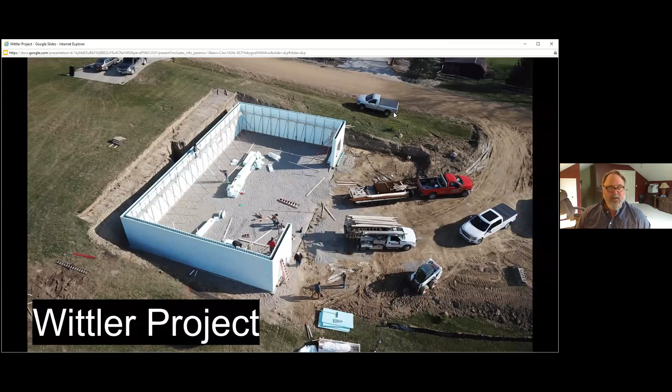I started this building back in November, and I've been planning it for about 10 years. We have a home on the lake and needed a place for boat storage and lawnmowers and all that good stuff, and had them scattered all over. So in thinking about the building, the longer time went by, if you're in the concrete industry, which all of us are, you start thinking about how can I do some interesting concrete stuff. So what I tried to do was make a building with as much concrete and cement as I possibly could. That was the purpose of it.

There were a few considerations we needed to do in regards to the building. One thing I want you to notice is that with the footprint of this building, we had a fairly large hill right here and it wasn't much use for the property. So we kind of wondered, could we dig the building into the hill and have it there?

So that's kind of what we decided to do. I had a neighbor up in this area that really didn't want to stare at a major building. They didn't want their view of the lake to be obstructed. So we talked with each other and figured we'd put this in the ground, and now from their view, all they can see is a little bit of the roof, which worked out pretty well.

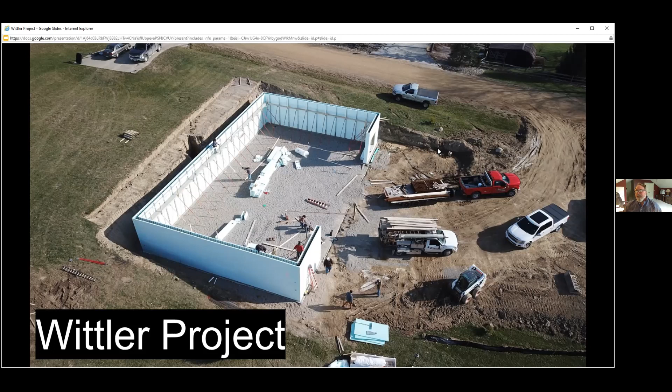But we moved an enormous amount of earth out of here. You can see that from the first slide I have. It took quite a while. We broke ground, I think, in the third week of November, so this was going to be a wintertime project right from the get-go.

There's our lake house right now across the road. We're planning on doing an expansion there. Based on the results of the ICF and other things we did on this side of the road, I'm very seriously thinking about incorporating all that over there. Now it is a log home, so one of the things I'll talk about at the end of the presentation is how I can tie that all in.

But when we started the project, there were a few things we wanted to accomplish throughout it. This is just an overview, starting with the research and development of an extended pot life polycarboxylate. Now that's directly related to our business — as Steve said, I'm the president and CEO of Premier Concrete Admixtures.

When you're doing R&D work for admixtures, you can do all you want in the lab with mortars, and then once you develop your products for mortars, you move on into concrete and do your testing in the concrete lab, and things can go wonderfully. But until you get those products into actual field concrete — mixing them up in a truck, going through the batch plant and everything else — sometimes it doesn't work out the same. So a good research and development system has to go all the way from mortar into the concrete lab and out into the field. Well, there's pros and cons to that.

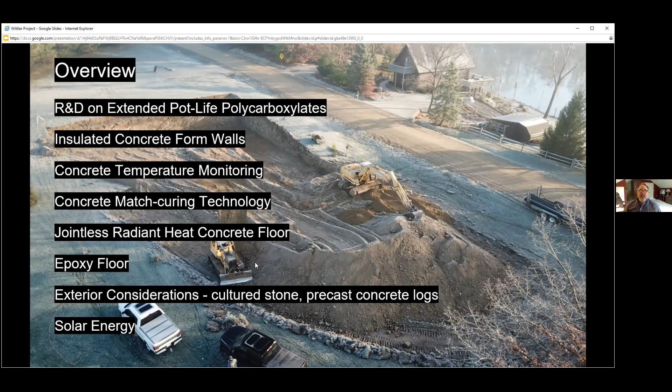So with the overview done, let's just dive right into it. When you're looking at footers, footers are a great place to test concrete. You don't need a lot of strength, they're very forgiving. If you have to add water to get the stuff in, no problem. It's just a great place to take advantage of doing a preliminary run on what you want to achieve down the line. So when we decided to do that, we picked the same mix that we were going to run with throughout the entire project.

The only difference between the mix in the footer, the wall, and the floor is that the footer and the wall contain natural stone. The interior floor consists of crushed limestone instead. I did that because I wanted to try to get the most durable floor I could on the inside, because of the epoxy coating and because we weren't going to be sawing it in any way.

So when we started the pour, we went with a standard mix, which I'll outline here in a couple more slides—564 pounds of cement, et cetera, but I'll get to that soon. We wanted to look and see how the concrete performed versus its pot life, as I said earlier. We wanted to check out the air consistency. If we had to retemper, we wanted to establish some retempering guidelines so that when we got to the wall, we weren't going to overshoot any slumps.

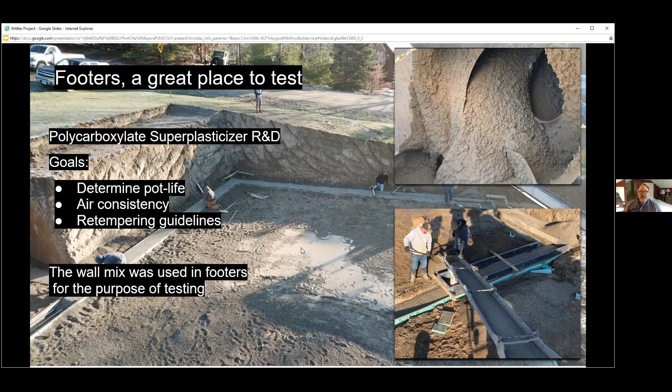When we did the curve, we dropped off enough concrete to make about 16 cylinders. The main thing you want to look for on breaks with the curve is usually early age accuracy. That's the biggest difference between concrete put in a cure box versus knowing the accuracy of your 1-day break, your 3-day break, etc. The reason you want to know that is because that's usually when decisions are made regarding stripping a wall, recycling forms, or whether someone can release a tendon in pre-stress situations. Those early strengths are critical, and relying on a cylinder all the time, depending on how it's cured, is usually fairly inaccurate.

So when we make the curve, the maturity consideration you always want is to be conservative. How are you conservative? When you make that concrete into your cylinders, you want to try to get the highest allowable air content and the highest allowable water-cement ratio. The reason is you want to make the concrete as weak as you can while still meeting specifications. That way your breaks and your maturity estimates will generally be lower than what's actually in the piece you're trying to gauge. In maturity, it's always best to be on the conservative side, and one way to do that is by making that curve concrete as weak as possible.

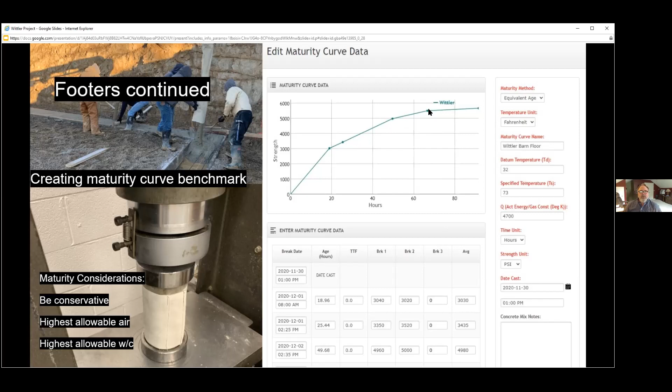To give you some dimensions and considerations on what we had with the wall, the width of the project was 48 feet wide. Why did I pick 48 feet? We did that because of the trusses. We were putting attic trusses on top of the building, and that was the longest span we could have without having to bring the trusses in pieces and reassemble them on site. It was also a trucking issue. 48 feet was the longest continuous span I could get on a truck.

The length of the building is 80 feet long. The reason we settled on 80 feet is once we had our setbacks on the property lines, etc., that's about as long as I could make it.

The ICF forms came from a company called Nudura. I know there are plenty of other options out there. Honestly, the reason I settled on Nudura is because my basement contractor was familiar with it and had done jobs with it in the past. This project came together fairly quickly, so I changed my mind a couple times, going back and forth, and in the end it was easier to just run with what he said.

That was a good choice anyway, because I'm very ecstatic with the performance of the product. I like how they go together, I like the rebar systems, everything was really cool. The other nice thing about Nudura is since I'm building this in Michigan, I elected to be my own general contractor, so I'm pulling my own permits. Nudura had engineering stamps, which I had to have for my plans to be approved by the local building inspectors. So the design, most of the spacing of the rebar and everything came from Nudura, so I didn't have any problem pulling permits.

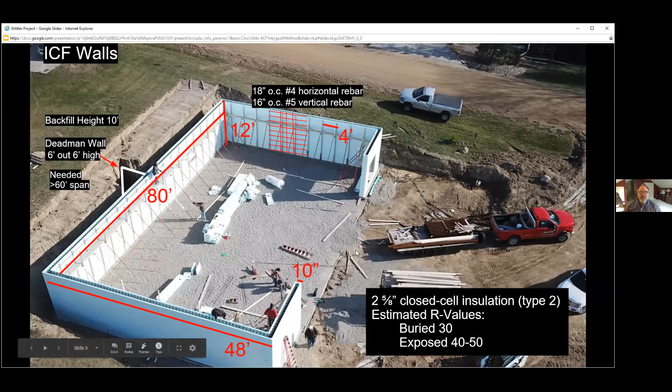Once the walls were up, we got on to our next phase of the project where we wanted to do some temperature monitoring, and also while doing the temperature monitoring, incorporate maturity estimations and match curing.

We were kind of curious because I really didn't know what the heat would be in these areas. I had originally expected this top level to not be as warm as the rest of the concrete, mainly because this was an open top. This top was left wide open after the concrete was filled.

We got some interesting results from it. Actually, I don't think I have a slide of it, so I'll just tell you now: the coolest part of this pour actually ended up down here on the bottom, and it was at times 10 degrees cooler than everything else. The only thing I can attribute it to is that it was sucking the heat out into the ground. Of course, the heat rises up throughout the wall.

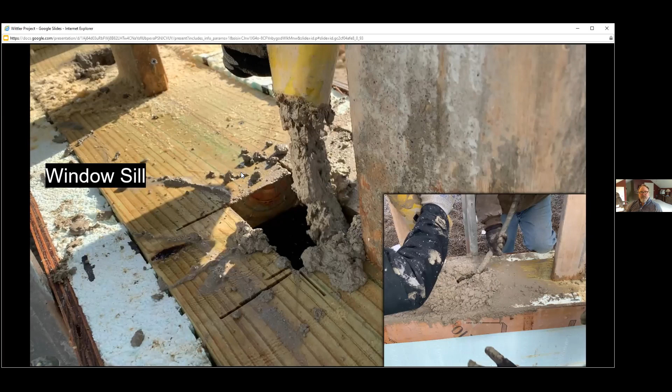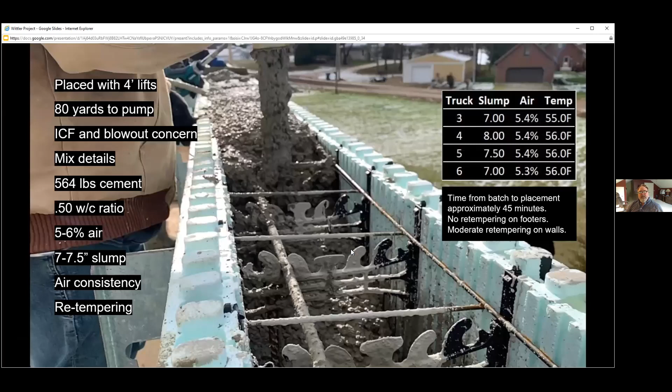This picture shows the cylinders from the actual pour itself. We did the same thing as we did on the footer mixes: we dropped off a sample at the plant—you can do this on site too—made the cylinders, put them in the box. Then the node on site took all the information from this pour and sent it up to the cloud, and the cloud sent it back to this unit.

This unit was recording and telling the heating and cooling system—telling the water where to go and how quick to heat up—so that the maturity curve you saw before graphing up would tell the water to increase in temperature, so that it makes the concrete get to where it is in the wall.

You'll see that this cylinder right here also has a temperature sensor in it. So when the water gets the cylinder up to the temperature, this tells the system that you're where you need to be, and then it just keeps continually adjusting.

So when you look at either verifying a maturity curve or actually wanting to see what the true strength of the concrete is in the form, this is by far the best way to do it.

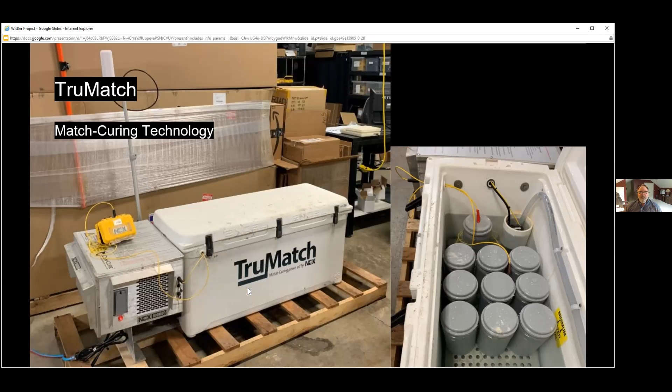In addition to doing the match curing and the maturity estimates, this is something I have wanted to do for a very long time. We will do more experimentation on it, but I wanted to see what different cure boxes did in relationship to the actual strength of the concrete.

I've got a lot of customers out there that have gone through hell with regards to cylinder breaks on the job site. They're not accurate, especially at early ages. They close the gap toward 28 days, but nobody had really ever told me, in the 35 years I've been doing this, or I haven't seen a real good comparison on what happens when a testing company comes out, or somebody makes cylinders and sticks them in a plywood box or some other kind of housing in the dead of winter. In the summer, I'm sure there are other effects to it, but I haven't gotten to that yet.

Here in the dead of winter in December, we decided to do companion cylinders on all of these methods of testing. Normally, if you're on a job site, you'll see a plywood box is where a lot of people put cylinders. Some will put it in coolers that are just plain coolers, with no heating devices in them. Some are field cured—we did field cured cylinders on this. What we predicted, they'd freeze—and they froze. So you're not going to see any information on field cured cylinders, because that's a total waste of time.

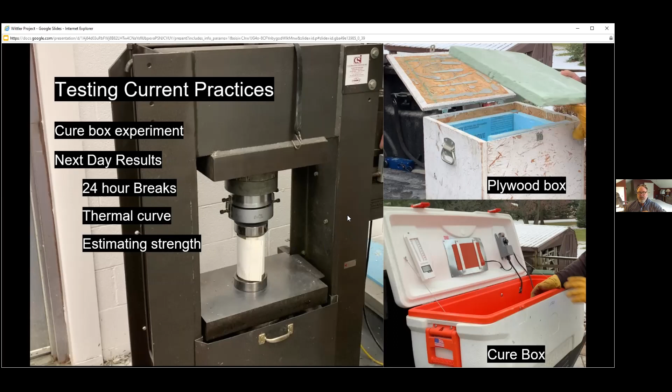The things we looked at: we wanted to compare the 24-hour breaks on all these units. We wanted to check the thermal curve to see where that was in relationship to the various stages in the wall. And then we wanted to see how estimating the strength went. So at 24 hours, based off taking a cylinder out of the TruMatch box and breaking it, the actual strength of the concrete in the wall was 3,240 PSI.

The projection we made when we estimated the strength based on our maturity curve was 3,172 PSI, just a 2% difference. So our maturity curve was extremely accurate in predicting the actual strength of the concrete. We were happy we were a little lower than the actual strength because it was conservative, but that does not always happen. Maturity says as long as you're within 10%, your curve is good. We like to get a lot tighter than that. For this project, we were at 2%.

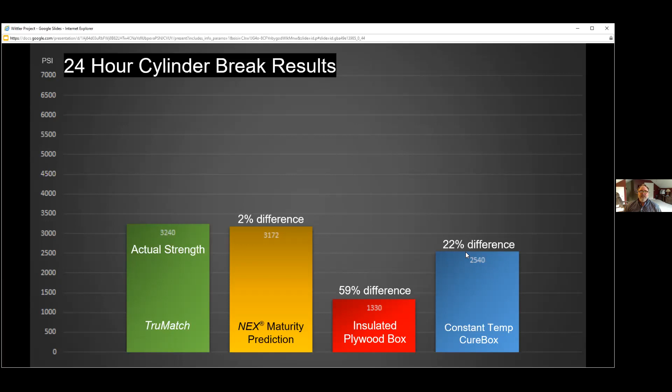Now we flip over to the insulated plywood box. 1-day break, 1,330 psi, a 59% difference. That box was not that cold, but that shows how drastic of a difference you can have in how representative those cylinders are to the actual strength of the concrete. We did a little better on the cure box that we had at a static temperature of 72 degrees, 2,540, but we're still 22% off. So we basically reinforced what we thought would happen.

Some engineers would probably justify this, and it's correct - if your specifications are only concerned about 28-day breaks, as long as your cylinders are in a constant temperature and not moving all over the place, you'll be fairly representative at 28 days. However, if you have any construction practices that need to estimate the strength of that concrete prior to 28 days, cure boxes just don't cut it.

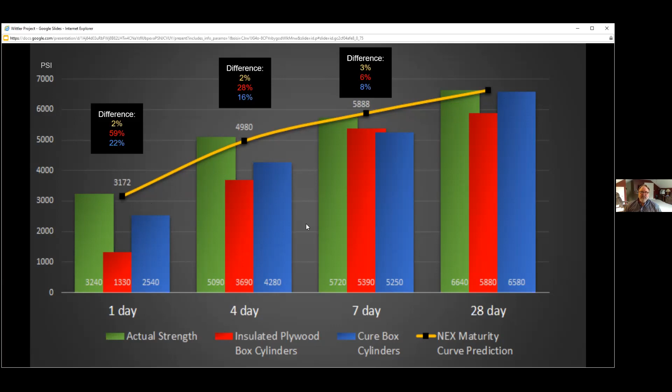Now we'll move on to the floor here. As I said, I wanted to do radiant heat - very, very happy with it, by the way. You know we had 48 by 80 feet for the flooring.

The concrete on the floor is 5 inches thick. I asked them when we designed that, is 5 inches okay? Most floors are like 4. They said not a problem at all - the only difference is it's just going to take that much longer for the floor to warm up. But once the floor warms up, there's no big difference between an inch of depth. I said earlier on, we did go with structural fiber at 5 pounds per cubic yard.

I was shocked. While they were power troweling, there was no grabbing of the fibers, no balling up at the surface, no real adverse effects whatsoever. I was pleasantly surprised with that.

But the real good thing was there wasn't any cracks. We don't have any cracks in the floor. So knowing that you can do a span of 48 by 80, 5 inches thick without worrying about any cracks, that was really cool.

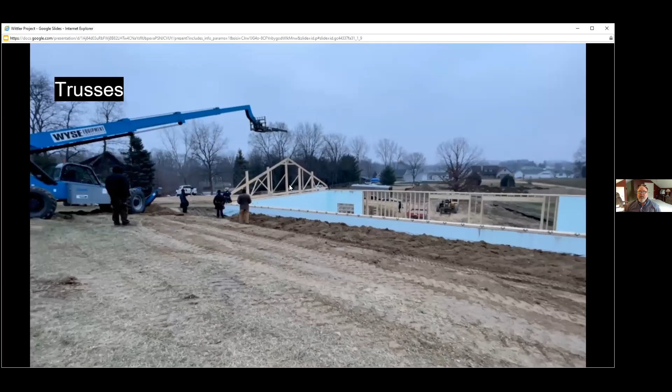I talked about the attic trusses just to get off concrete for a little bit and some other interesting facts. This is that 48-foot span attic truss. Here is the space that will be available to us. The cool thing is that to the peak of the ceiling, we're getting about 7 feet 10 inches, almost 8 foot. So it proved to be really spacious up top without actually having to add another level to the building.

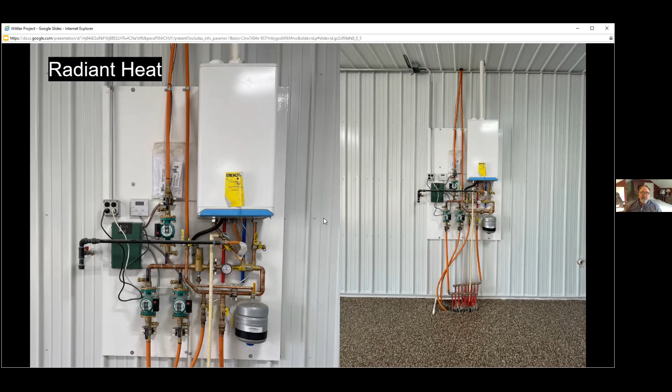Now, as things evolve with solar energy and backup batteries and things like that, if I want to, I'll pull this unit and go with an electric boiler at that time. But right now, the difference in cost between a propane boiler and an electric boiler is probably around 10 grand. So that was another reason that I decided at the last second to switch it out.

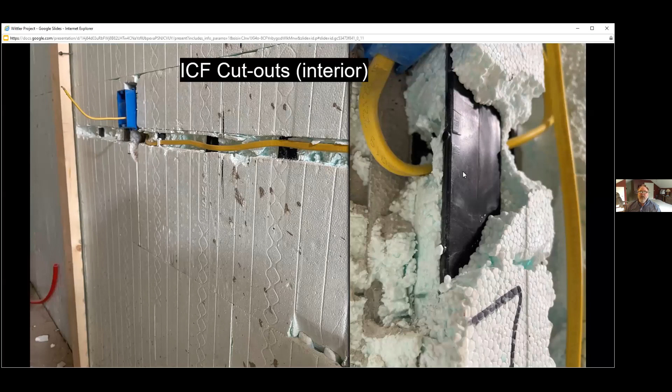That's what you use to adhere any siding to the foam, or anything you have to nail or screw down. I'll say that once you get into these suckers, they're hard to penetrate. If you have a self-tapping screw, once it grabs, it'll suck that screw right in.

When we did the steel siding inside of the garage area, I had a choice to make. Normally when you put up siding, you'll put your screws in every 9 inches on center, that way you never end up with a screw on the seam of the pieces.

But to put furring strips on there to make that happen, that's going to leave you the depth of the furring strip as a cavity. So if somebody ran up against the wall with any force, you'd dent the siding.

So I made the decision not to do that, and I stuck with the 8 inches on center of the plastic studs in the forms to fasten the steel to.

The only problem with that is every once in a while you'll end up with a mending screw that lands on the joints. So if you look at it, it's not going to look totally perfect, but it's a sacrifice I was willing to make, because up against this wall, you're not going anywhere. It's right up against the foam and the concrete, very sturdy.

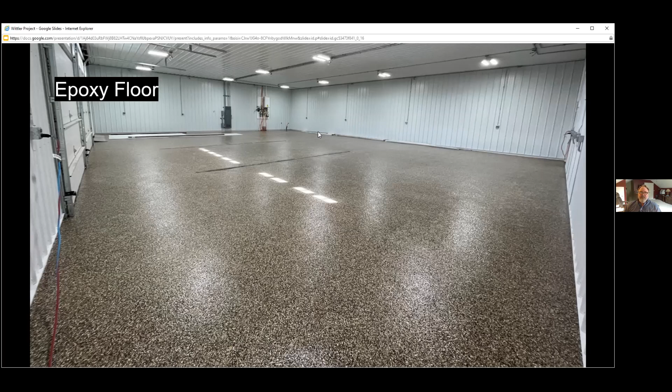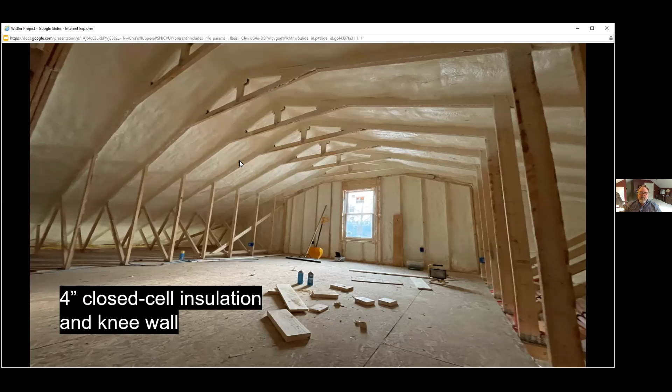This is 4-inch thick closed cell spray foam insulation. I'll see how it goes -- hopefully we don't get any condensation up there. I am putting in an air exchanger to try to help that out as well, but the building is extremely tight.

This is another view looking down the other way, just to give you an idea. Steve asked me yesterday why I didn't put a second story on. This is why -- we utilize the ability with the attic trusses to get a lot more room into it.

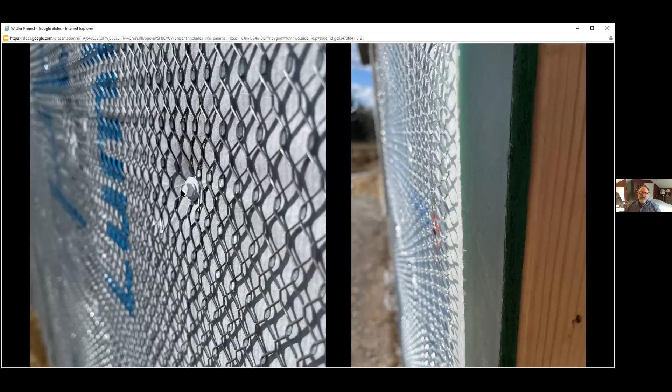So this is an example of how the screws get sucked into the plastic. Normally you wouldn't use this type of screw to adhere the mesh for the cultured stone scratch coat of the mortar, but we couldn't find any readily available, and these were leftover from the steel. They're 2.5 inches long.

But what we found is once you hit that plastic again, it draws that screw in fairly tightly. So if you ran your hand from here over this screw head to here, you wouldn't feel it, because it's indented right here. So it's not going to impede the mortar at all.

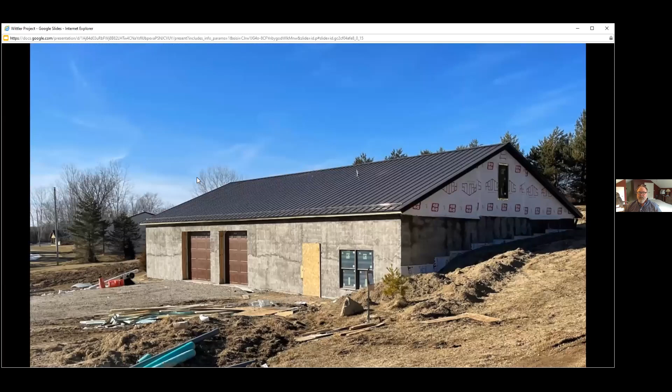And then we come up here -- this is the most recent picture of the building that we have. This is the scratch coat of the mortar that's on the building. Again, more cement, more concrete per se that we're utilizing.

And the only decision left to be made is whether this gable right here gets done in log siding to match the house across the street, or if we go with the precast logs.

That's a nutshell right there. If anybody's got any questions, feel free to ask. I'm sure there's some things I probably forgot, but if you've got any questions, let's hear them. Feel free to use that Q&A button on your Zoom software control panel to type in a question.

Just to reiterate, Doug, you're going to do the cultured stone everywhere we see this scratch coat on top of the foam, correct? Correct.

There's another note I'll give here too, which will be interesting. I think in the beginning, how Steve and Heather came to ask me to do this presentation is when I started it, I was just playing—this is just a playground of concrete for me. I started posting all the different applications we were doing on LinkedIn, with some video feed describing what we were doing. If anybody's interested, go onto YouTube and search the Premier Concrete Admixtures site, you can see all these videos. I'll continue adding to them, because one of the things I said earlier, I'm a big believer in exposed aggregate. I like the way it looks, I like how it holds up, and I like how blemishes that occur don't look like blemishes.

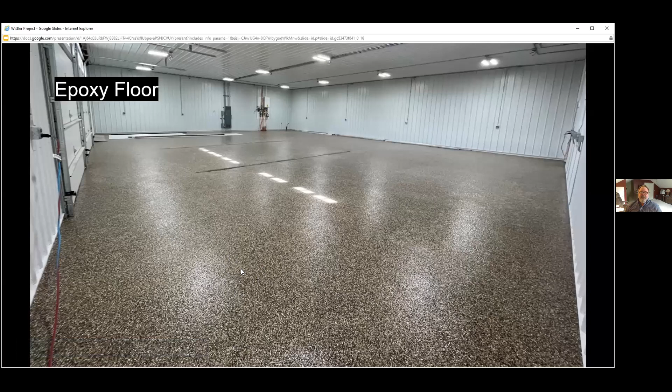Going back to this slide, this kind of has an exposed aggregate look. I picked the colors because I've done some more exposed aggregate on my site, and this driveway is going to be exposed ag. So whether you're on the inside looking out or the outside looking in, when these doors are open, there should be a very close transition from the exterior to the interior. I'm hoping we can pull that off—I think we will. The colors should match pretty closely.

Cool, very cool. In regard to that floor, were there any special subgrade considerations to do that 80-foot by 48-foot jointless floor?

Actually, I was kind of concerned about that, and I just deferred to the contractor. To be honest with you, time will tell—I don't know if there will be any additional settlement over time, and maybe a crack will occur. They just put in stone, depending on depth it varied anywhere from 5, 6 inches to 8 inches. It was just gravel, pea stone, and they compacted it as best they could. I was a little concerned about that. Given my experience in the testing industry with compaction, I didn't know what to expect, but to be honest, I'm on the technical side—I tell people my expertise is plastic concrete, subgrade preparation, things like that. I just had to throw my hands up and defer to the guys doing it. So far, so good.

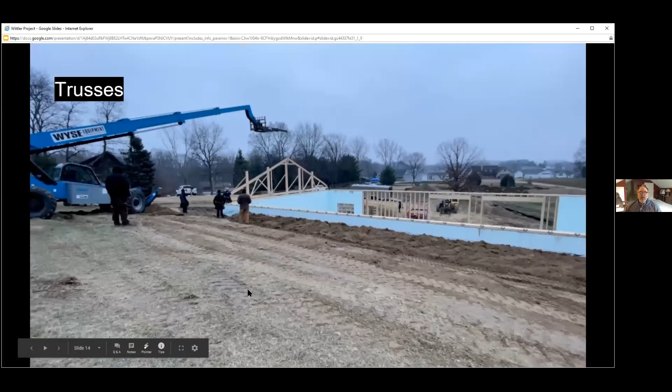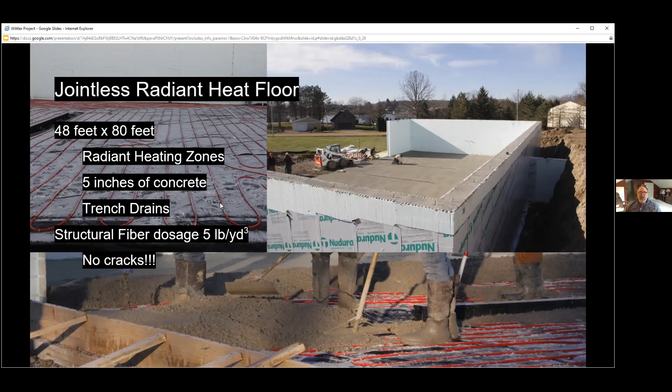That was the only subgrade preparation we did, other than covering it and keeping it wet before the pour. There was a time when we had the floor ready—there was a picture here, right before they ran the hose on top. Below the vapor barrier is a 2-inch piece of closed cell foam, so that's some special preparation on top of the stone they compacted. There was 2-inch closed cell blue board, and then we put the vapor barrier down. The day we were supposed to lay this hose out, it had snowed the day before, melted, and we had to shovel off about an inch and a half of ice before they could put it down. That was really the biggest wintertime hindrance we got out of the whole deal. We got lucky with all the earthwork—they went right up to the day they couldn't do it anymore, and we really didn't miss any opportunities.

We've got a lot to do. This building has to be finished by the end of May—I'm thinking we might get done by the end of April, but we've got to put a well in over here, and a septic tank over here. Even though they have a centralized sewer system, they use septic tanks for solid waste; liquid waste goes into the pipes and goes out. Another concrete feature on this building is right here—we've got to put a retaining wall that'll come out about this height. It's a little hard to see the contour of the ground, but we're going to have a retaining wall coming down to about here and then back down.

That has to be done, and that'll also be finished off with cultured stone. But at the end of the day, when it's all said and done, I will have done what I always said I wanted to do. I built as much of a concrete house as I was comfortable with. Could have made the roof in tile or concrete tile, but I'm pretty happy with what I did.

Excellent. Would you do it the same way again? Anything you'd do different based on your experience so far? The biggest thing I would have done different, if you see back, I think there's one of these pictures. Here's a good one.

I stopped doing the ICF right here. The reason I did it, I kept changing my mind on how far to go out, because some people I talked to that had done ICF structures said where they had big doors, it was just easier to go ahead and frame them in wood. And I didn't have the experience.

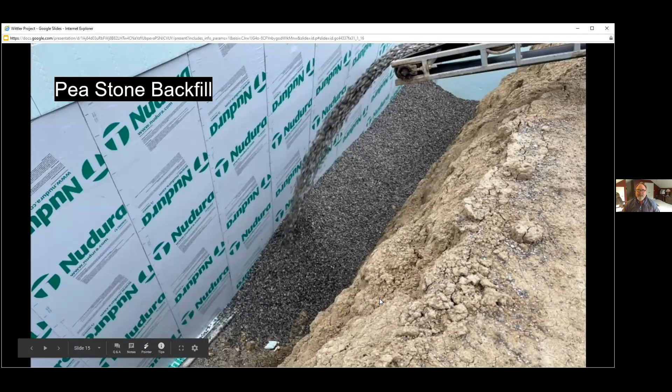Well, I just have one last question. Is that a fairly clay site? I noticed your excavations, they were pretty vertical excavation cuts. Solid clay, okay, solid clay all the way up. This right here, 10 foot down, solid clay. We have no sand in this part of Michigan. Gotcha, it's rough material to work with. Solid clay, okay, that's what I assumed based on the height of those and the steepness of those cuts to put that building into the hillside.

Yep, excellent. Well, I don't see any more questions. Feel free to type in if you do have them.